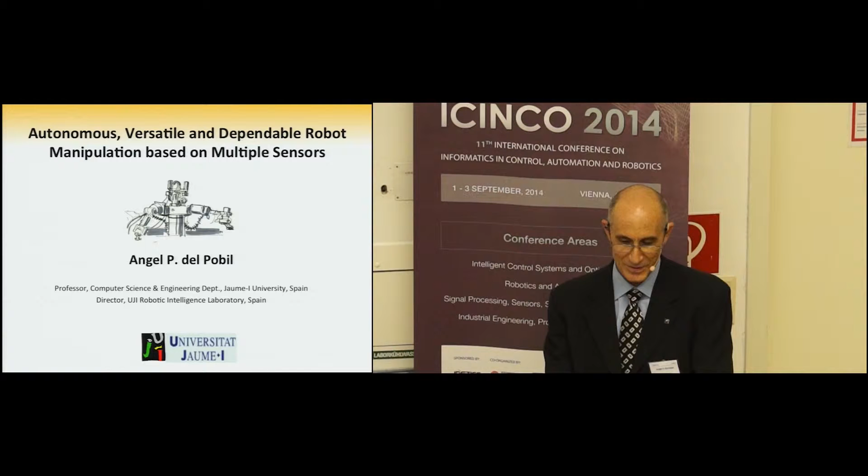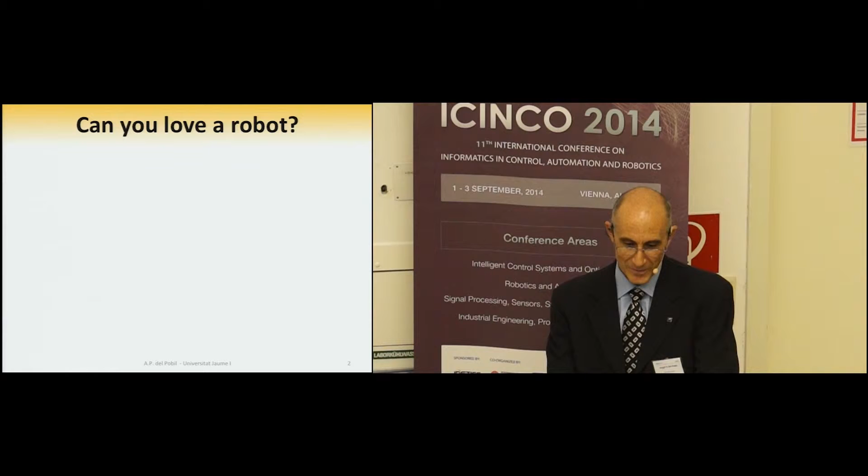So I bring a new challenge for you. Can you love a robot? This would be an interesting topic, but maybe not for today, maybe in another conference, more socially oriented. So maybe we can rephrase that and make it simpler and say, do you like your robot?

I will take this chance to introduce you to one of our experimental platforms, Tombatossals, which is a humanoid torso. I'm sure my students like it, and I suspect some of them even may love it, judging from the number of hours they spend every day in the lab with him.

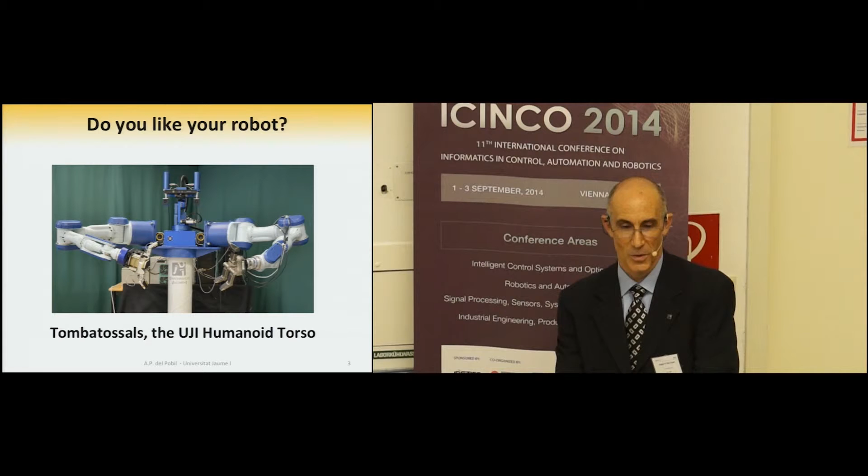Well, maybe even liking is not the right question, so let's go to something more practical. At the same time, I would like to share with you today one of my hobbies, which is collecting old movies showing robots. So this one is one of these movies.

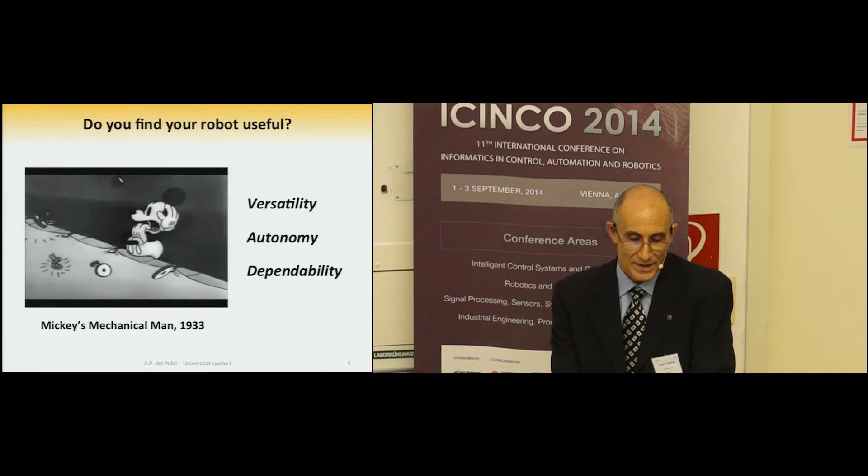And the question I would ask you is, do you find your robot useful? Because if it's useful, then you will like it, and you may probably love it. And the answer to this question is dependent on to what extent it is versatile, it is autonomous, and it is dependable. In this movie, you can see that the robot is versatile.

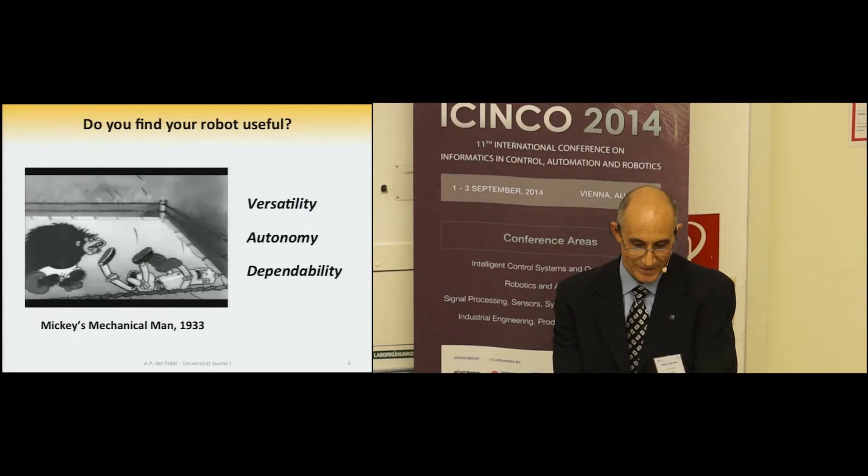Now it's boxing, but it can also cook and do different kinds of tasks. It's autonomous, it's behaving without human intervention by itself. And in this case, the most important part is that it's dependable, it's robust and reliable.

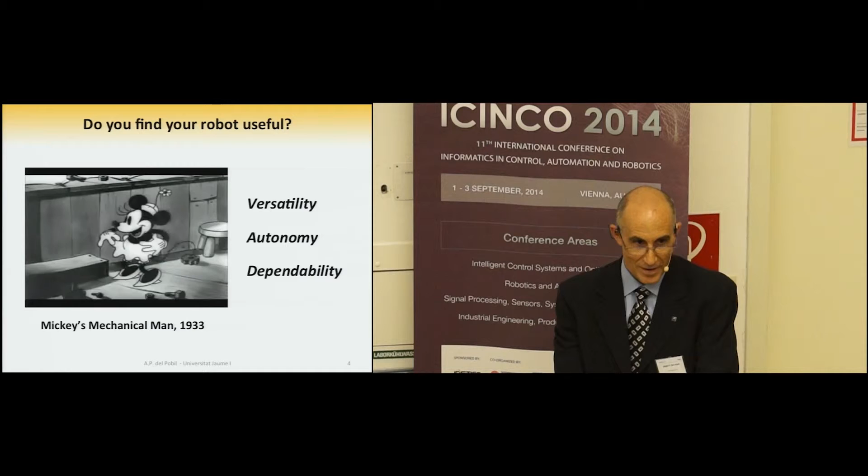Now it seems it's not very reliable, it's having problems, but with very little human intervention, in this case from Minnie, you will see that it's going to recover from this error, from this problem, and successfully conclude his task in this boxing match.

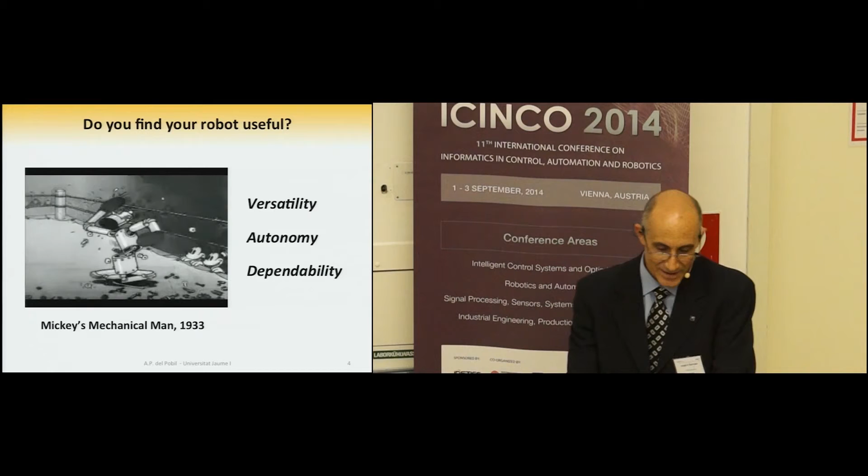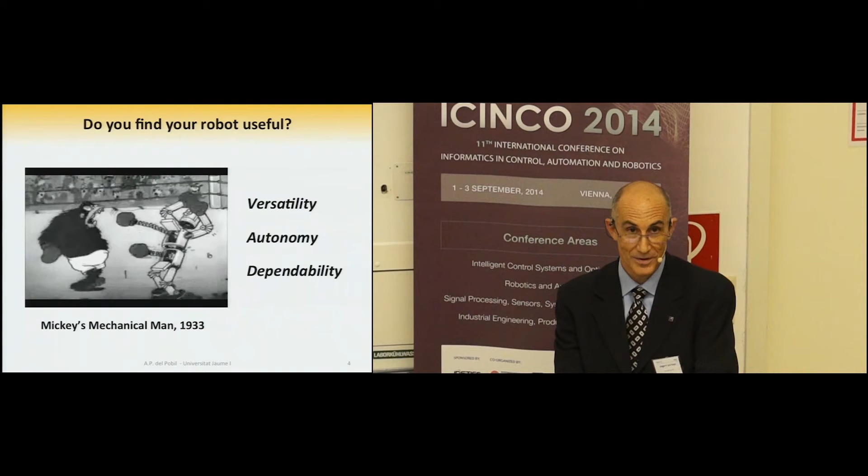Incidentally, this movie is so old that they don't even use the word robot. They speak about a mechanical man. I think it's the oldest animated cartoon. If you know of any other showing a robot, please let me know so I update my information.

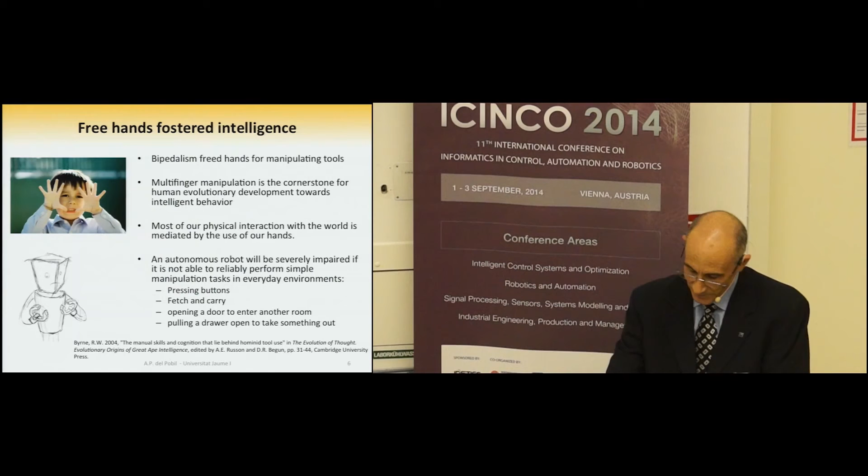So I think most of you would agree with me if I say that for a companion robot—and I'm not speaking about industrial robots or many other kinds of applications—companion robots or service robots that need to render some kind of personal service really need to have hands, need to have manipulation. This can be based on results.